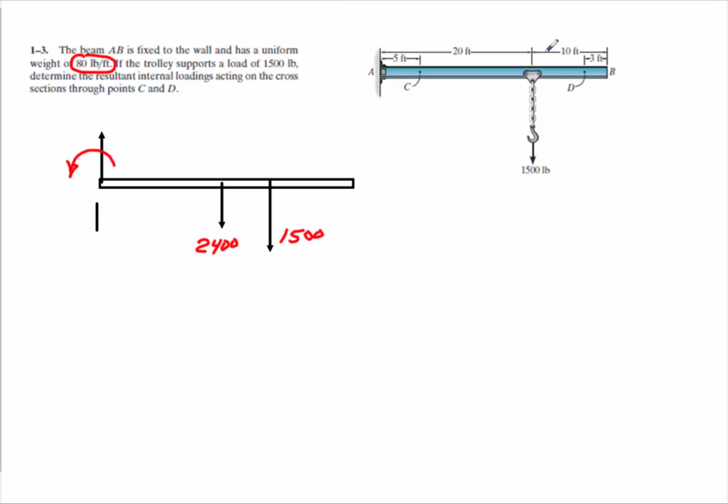I would immediately go back and identify the moment arms for each of these. The distance between here, that's 30, so that has to be 15, because the 2,400 is going to act in the middle. That's 15 feet. And then between here and here, that's going to be 20 feet. Okay, I mark this as the force AY and the moment at A.

My solution is going to be a little bit different than what the solution manual did, but we should get the right answer. So what you want to do here is take a moment. Now, the thing to note, when you take a moment, you have to include this moment here with a cantilevered beam. That's what makes the moment go to 0. Because if you look at it, you have two other forces here that are trying to make this thing rotate clockwise, so you have to have a moment.

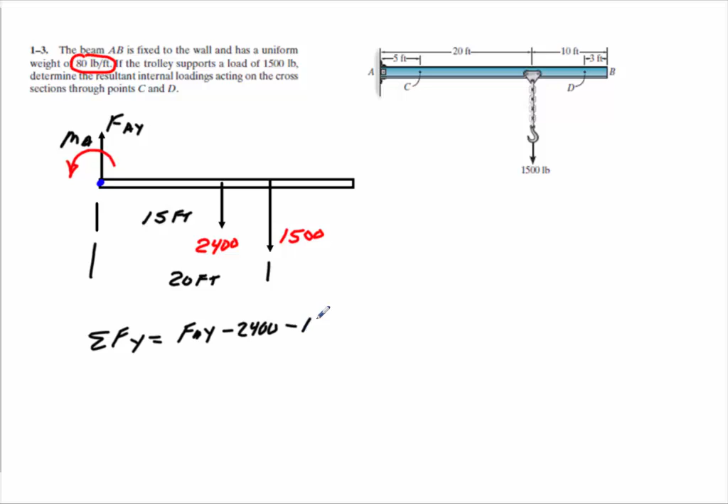So all you want to do in this one is sum the forces in the y direction first. You will get FAY minus 2,400 minus 1,500 is equal to 0. FAY minus 3,900 is equal to 0. This is going to give you 3,900 here for y. So we know FAY is equal to 3,900.

At this point, go ahead and just take your moment around A. And when you do that, you'll get the summation of moments around A is equal to 0. You're going to get minus 2,400 times this, which is going to be 15, minus 1,500 times 20, plus moment around A is equal to 0.

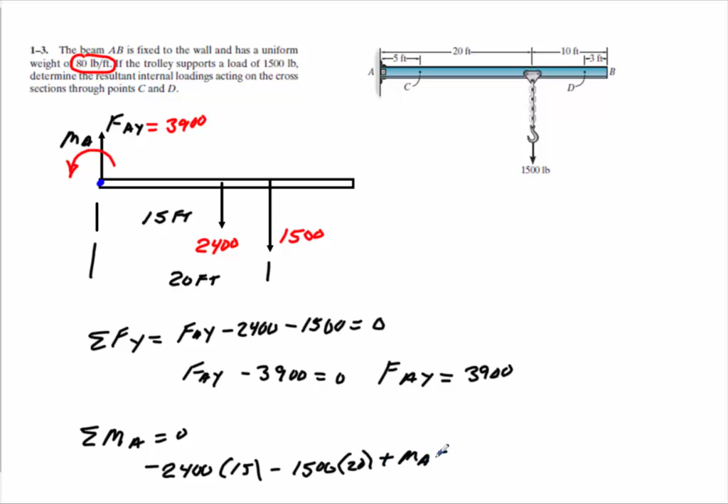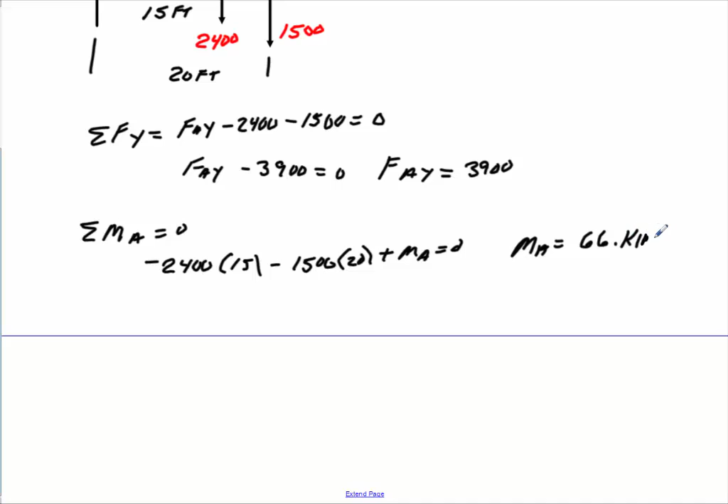Solve for your moment at A. And that's going to give you 2,400 times 15 plus 1,500 times 20. And that's going to give you a moment of 66,000. Or you can say 66 kip feet. That's going back that way. Alright, so those would be your reactions.

Very important that you can do this. Again, it's not hard, but never ever assume when you have a cantilever beam that the moment there is going to be 0. It's only going to be 0 because you have this moment here that cancels it out. So we have this here, circle this. Alright. Now we want to find the loading at C.

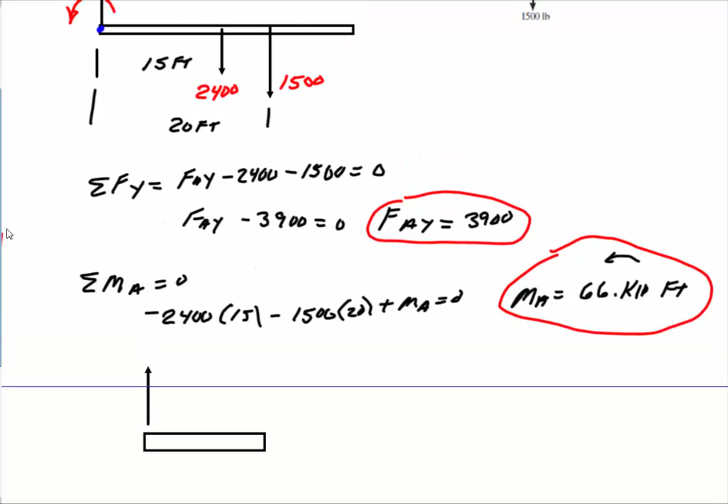To find the loading at C, what you can do is cut the beam right here and look to the left. Just make sure you include all this. So we'll go down here and draw a 5-foot section of the beam like this. We make sure we include everything here. I got 3,900 coming here. You've got to include your moment of 66,000 going this way.

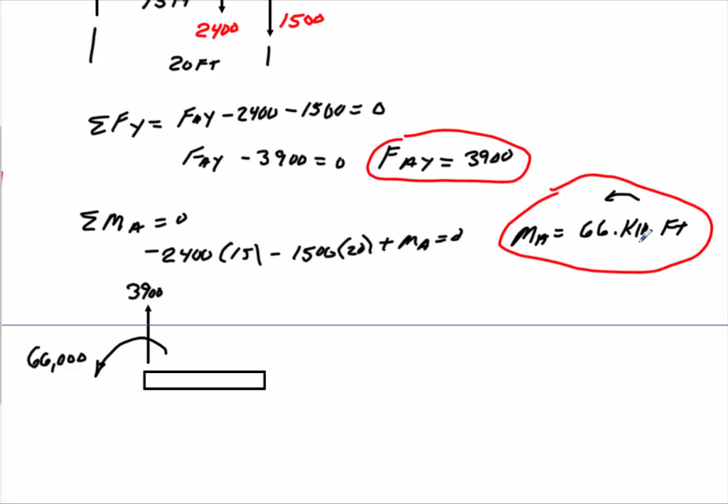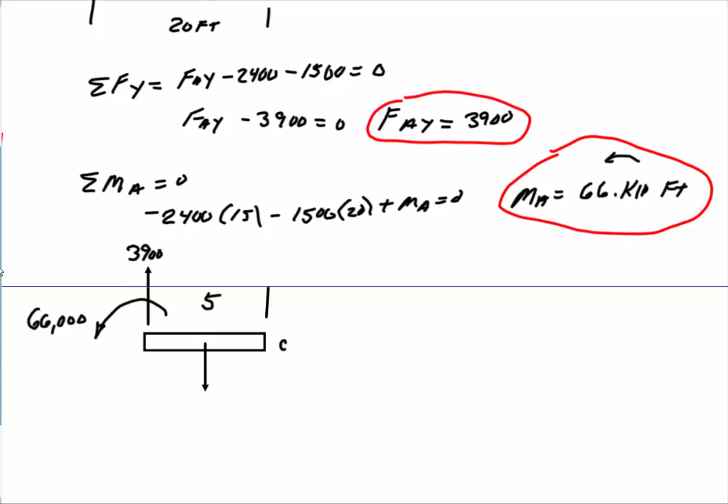Especially on tests, you might want to just list this as 66,000 because you can't mess this up. Now you have to consider the weight of this. This is 80 times 5, that's 400, acting in the middle. This distance here is going to be 5. This distance 2.5. And this will be our point C. And again, I did the 2.5, which is okay, but I need to label the force. So don't make the mistakes I'm making here.

Now, if we sum our forces in the y direction, we will get 3,900 here minus 400, plus FC is equal to 0. That's going to give me 3,500 of a force there. So that has to balance out. It's going to react this way. I just show it going down like this. Again, the direction isn't that essential. It just means you've got shear across here, but it has to go down to balance this out.

Now, if you sum the moments around C, you just add moments. When you have this, you do not multiply it by moment arms. So that would be 66,000 minus 3,900 times 5 plus 400 times 2.5 plus the moment at C is equal to 0. And when you do that, you'll get 47,500. Since this is going back this way, it's going to have to go back like that. And this would be in foot-pounds. Again, if you don't want to go this way, you can just cut the beam here and look to the right.

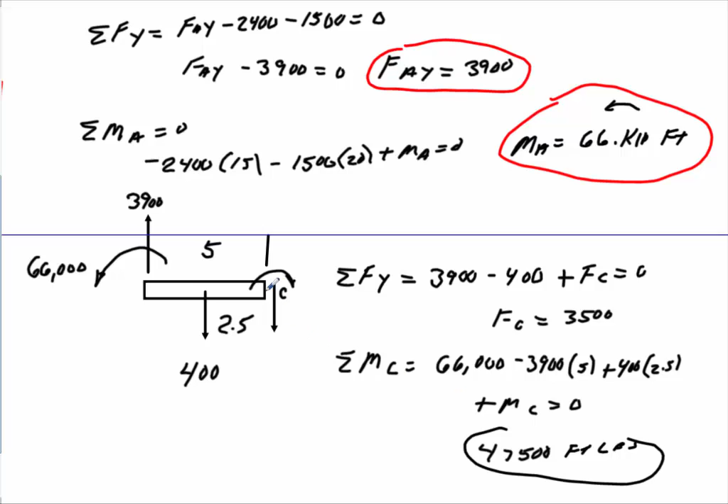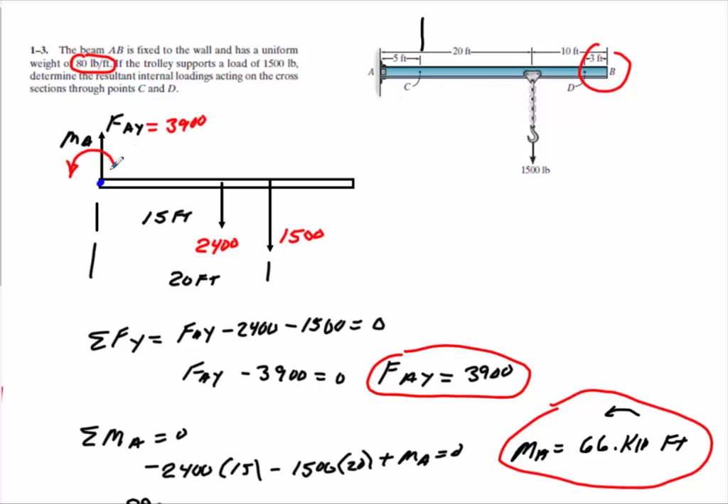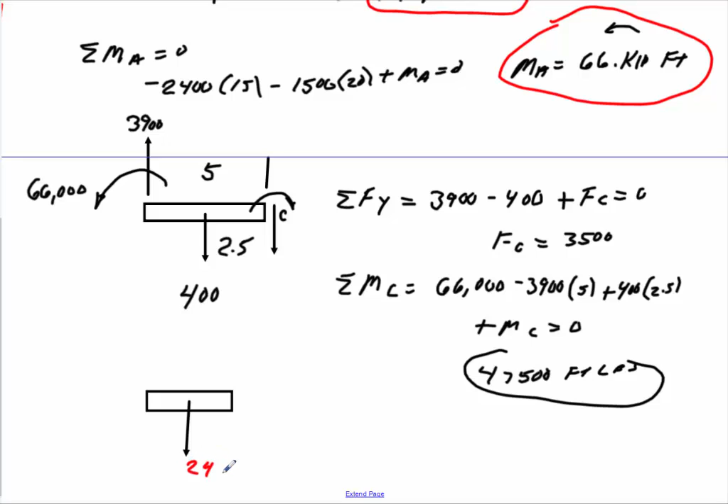Now to find the reaction at D, the simplest thing is just to do it right here and look to the right. I got a 3-foot section. Just draw yourself a little 3-foot section. You know it's 80 pounds per foot. So 80 times 3, that's going to give me 240 coming down. This distance here would be 1.5. So all you have to do now is draw what your reactions are going to be. You have a force up here. You have a moment going back this way here.

So now you would sum the moments around D and set that equal to 0. Here you'd get 240 times 1.5, I make that negative, plus the moment at D is equal to 0. And 240 times 1.5 gives me 360 foot-pounds. So it would be reacting this way, like this.

However, what's happening here is the beam is going to bend down. The beam is going to want to bend with 360 going back this way. So if you're doing it for design purposes, the beam's not going to bend up, it's going to bend down. If I was going to answer this on a test, and the question was, what's the internal loading acting at this point, then I would probably just show that the beam is bending like this and put 360 foot-pounds.